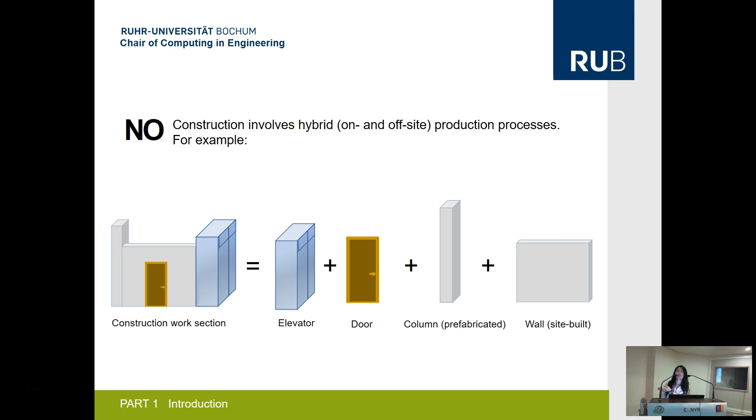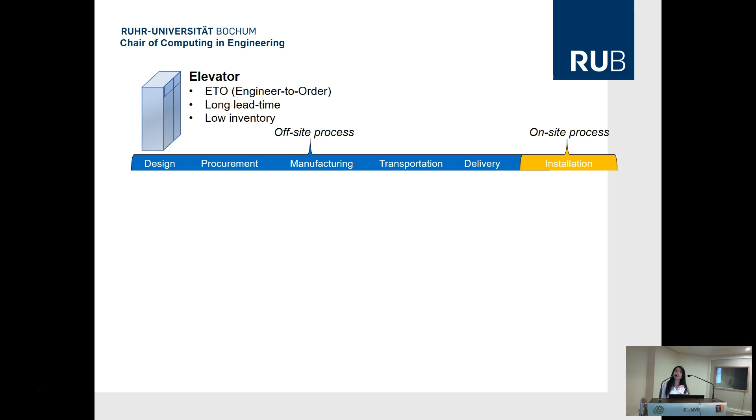and a site-built wall. I'd like to explain the features of the several elements with the customer order decoupling point theory. It's quite a classical production theory, but it provides us a good classification. As for the elevator, if we want an elevator, first we need to design it, buy raw materials, manufacture, transport, and finally deliver it to the construction site. After it's on site, it's very simple to install it.

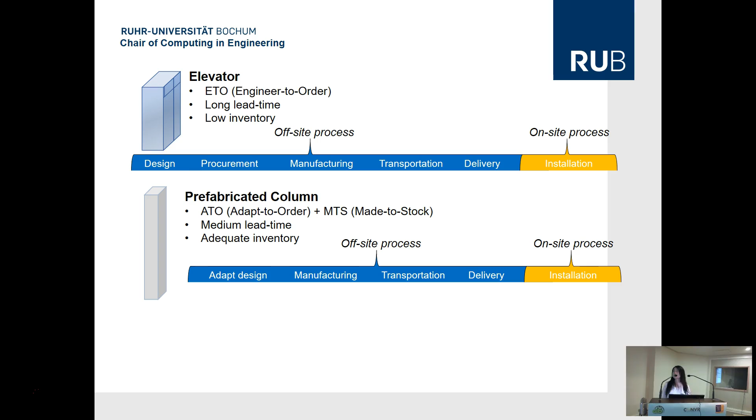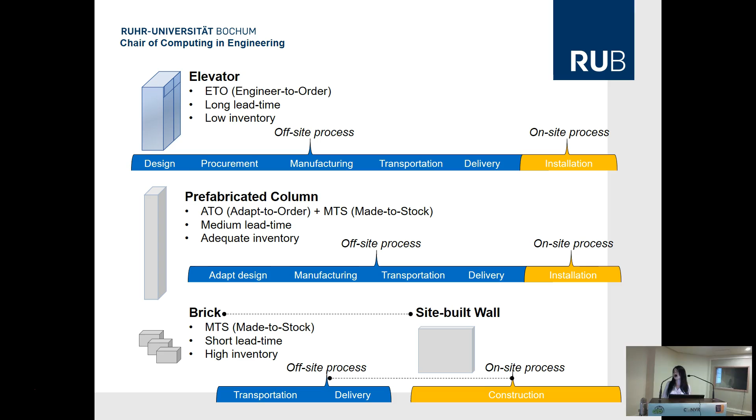About the column, the design stage is shorter, but we need to prepare more site inventory. And let's think about the site-built wall. Maybe we consider it has no offsite process, but it's not true because it contains several raw materials such as bricks, which is a kind of made-to-stock product. Even the supplier will hold a high inventory for this product type.

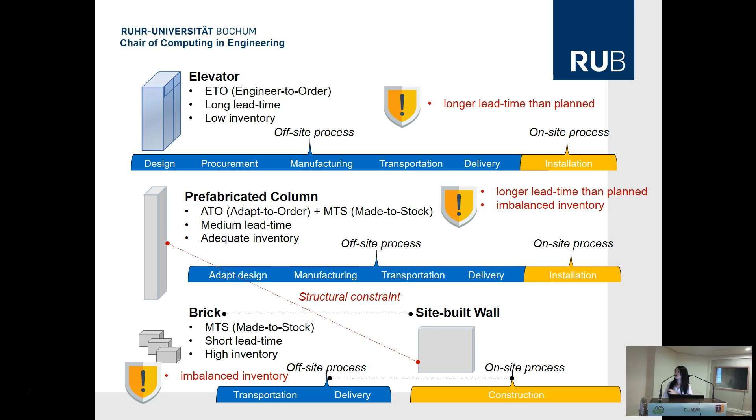So how about the problems? The first type, maybe the problem is a longer lead time than planned. The second type also has the lead time problem, and at the same time maybe an inventory problem. And the brick also has an inventory problem we need to pay attention to. There are also structural constraints between column construction and wall construction, so maybe there's delay caused by the install problem of the column.

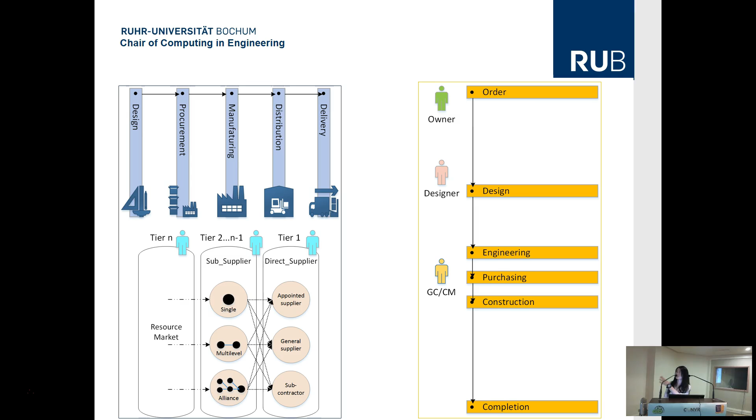So there are the offsite problems, but how can these offsite problems influence the on-site construction activities? We need to understand the dependency between the offsite process and on-site process. In construction supply chain research, there are two types of supply relationship. The first one is focused on the project participants, project organization. The second one is about logistics, and the physical flow is remarkable for this type.

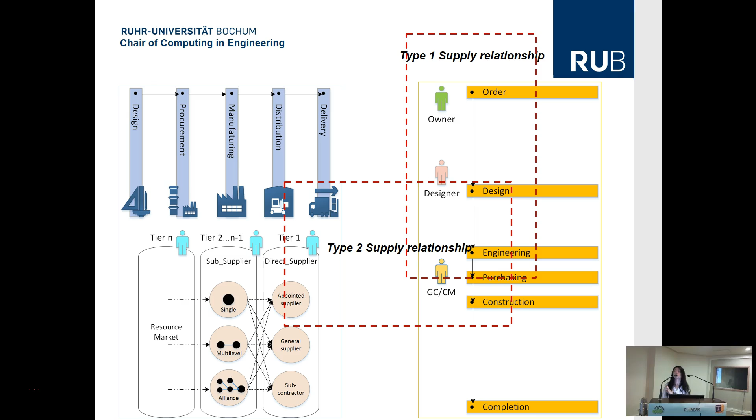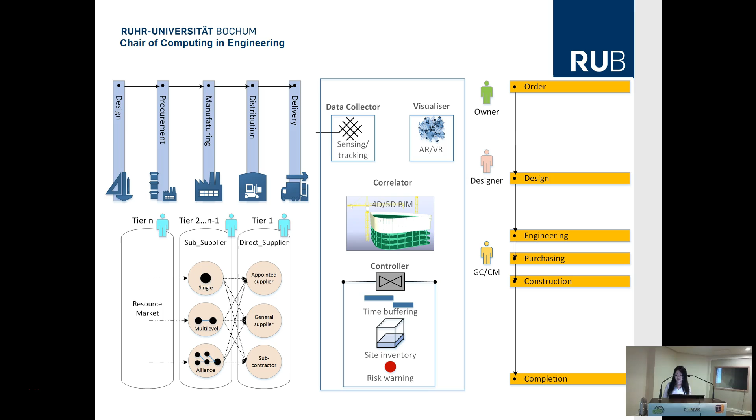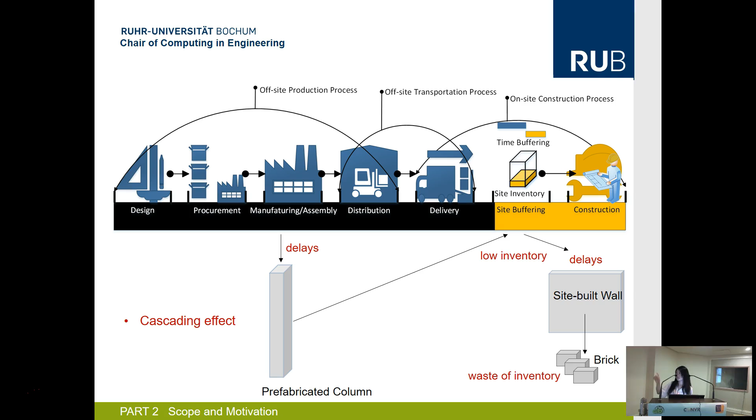The most urgent task is to deal with the cascading connection between the off-site and on-site process. We can simplify the cascading connection like this. For example, maybe there is a manufacturing problem with this prefabricated column, and it may cause both the delay of site-built wall construction and the waste of site inventory of brick. So what's off-site guarding and how does it work? I would like to introduce it with this figure.

Traditionally, our on-site construction manager or general contractor pays much more attention to the on-site activity, while the off-site participants like suppliers and subcontractors pay much attention to the off-site process. Possibly there will be joint logistics like the trade manager.

What we want to do is create an off-site guard, and he is responsible for grasping the key information from the off-site process to keep the on-site activity safe. And now it's easier for us to create this kind of guard because it can not only be a person, it can be an information agent like BIM.

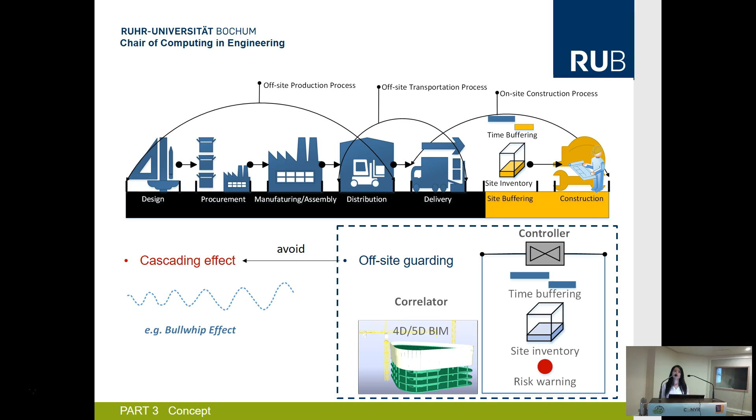So what we want to do is make use of BIM and a time inventory controller together to avoid or reduce the cascading effect, or at least we can indicate the risk and give the on-site construction a warning. And the most important thing is how to indicate the risk of delay for off-site guarding, and we applied a look-ahead supply scheduling.

I would like to introduce this with a case. This case is located in Chongqing City, China, and this object is a GBF embedded filler. It's just like a hollow box for the hollow slab floor system construction. It's a kind of made-to-order product. We need to pay attention to both the lead time and site inventory.

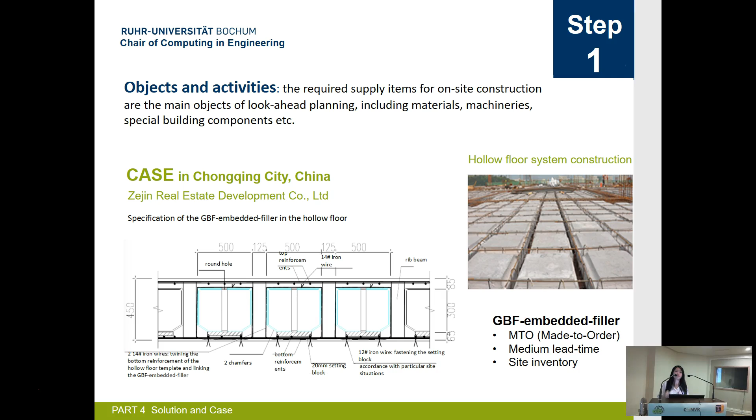Second step, we need to define the processes. We can see the GBF embedded filler is located after the floor slab formwork and rebar construction and before the concrete.

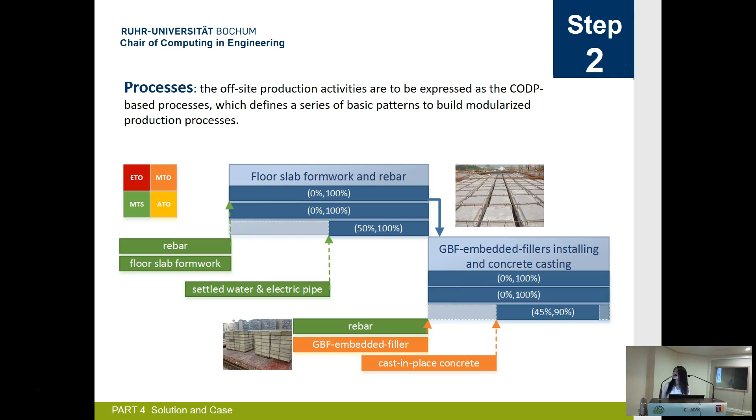The problem occurs off-site for this case. The construction manager asks the supplier if you got complete information to design and deliver it, because there are different bugs. The supplier replied, yes, of course, there's no problem, but the construction manager expected the process to follow the yellow one, while the supplier provided the process like the blue path, so the unexpected delay occurred.

What's worse is the formwork and rebar were prepared before, and the temperature during that time in Chongqing City is very high, and during several weeks of delay they got damaged, and the total cost is higher than the penalty of a single supplier. That's not a good thing.

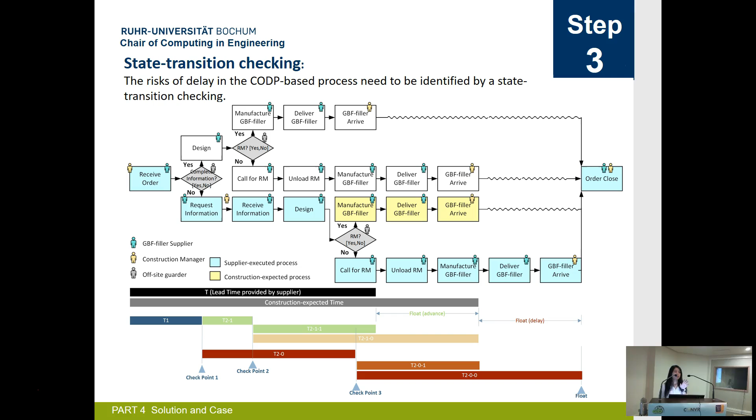So what we want to do is set several gates here, and we can check it maybe automatically. After each stage, we know the risk of delay, we know the risk value, and we can give a warning to the construction activities. And there are two ways. First, if the supplier can provide us the complete information, we can do the check very easily. Maybe the supplier can just register in the information system and click, and that will be very simple.

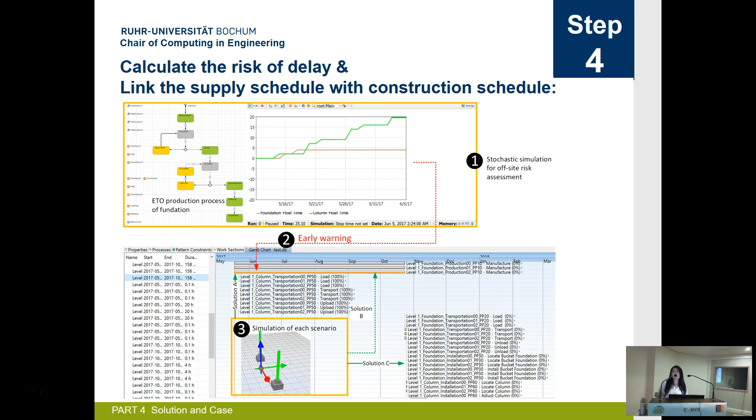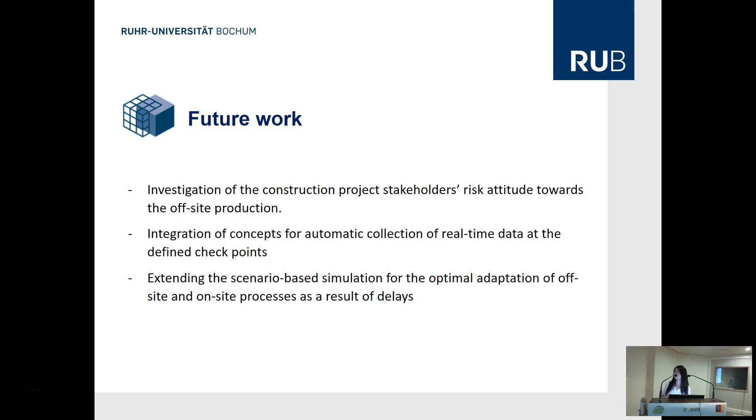And this paper is mainly about the concept. Following this, we will investigate the construction project stakeholders' risk attitude towards off-site production. Meanwhile, we try to find an approach to collect data, maybe more automatically. And we are designing a scenario-based simulation to support the decision making.